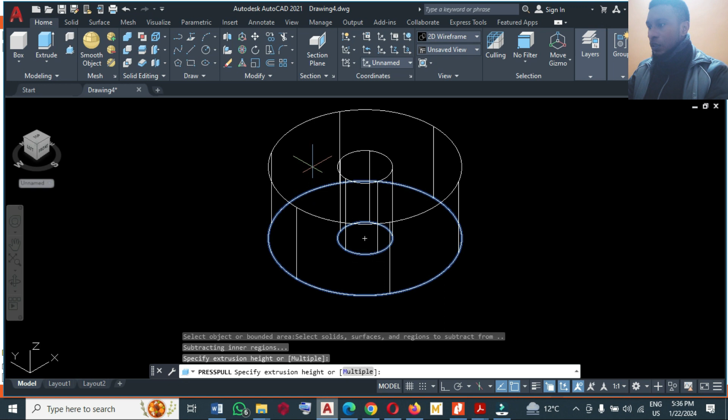So at this point I'm going to turn it to 3D. You click on the icon here, look for press pull. Let's make use of that and then let's change the visual style. I will have this. Okay, so now our drawing will now begin.

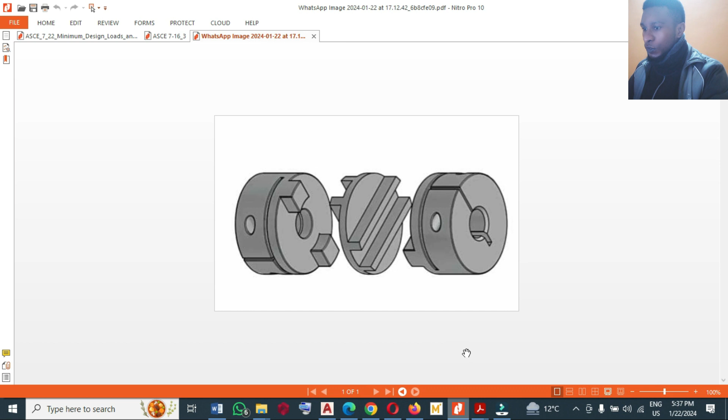Okay, so let's look at the drawing and see what we are going to add. First of all, we are going to add this at the top. For us to add that, we are going to draw a rectangle.

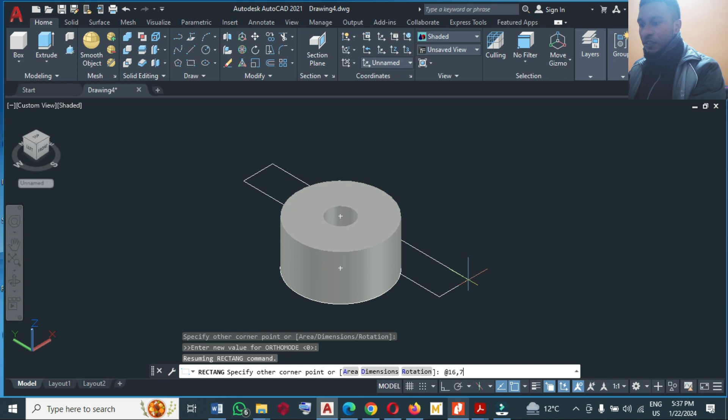Let's make a rectangle of, say, 16. So you can type at 16 comma, you can type 70. The other 70 does not really matter. Okay, so I'm going to move this to this center here.

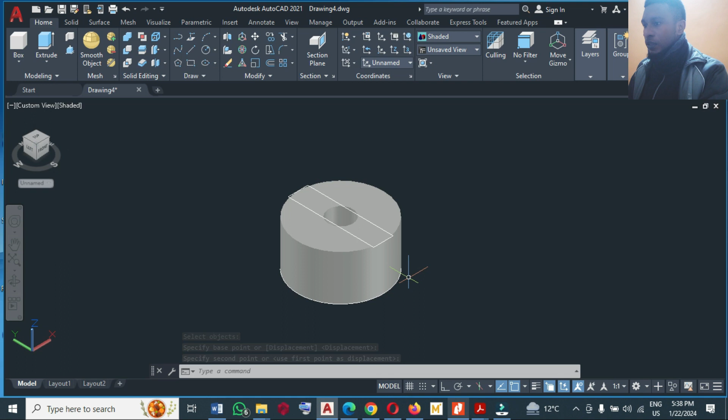Okay, so at this point I'm going to extrude, press pull this. So I'll take this place up 10 units. I'll take this one up also by 10 units. I can now delete this rectangle, it's not required anymore.

Okay, so let's check the top view of this. Okay, it's perfect.

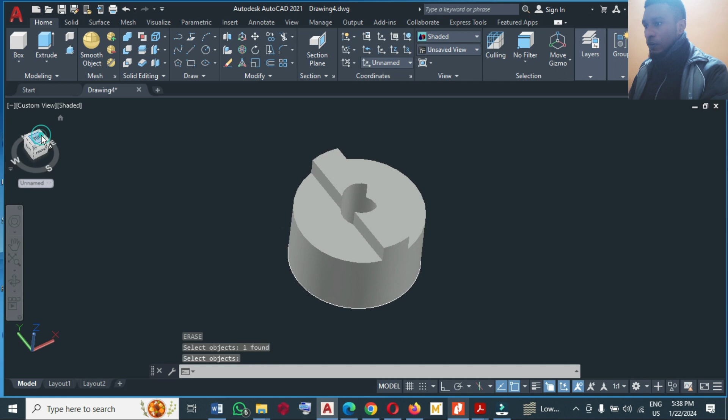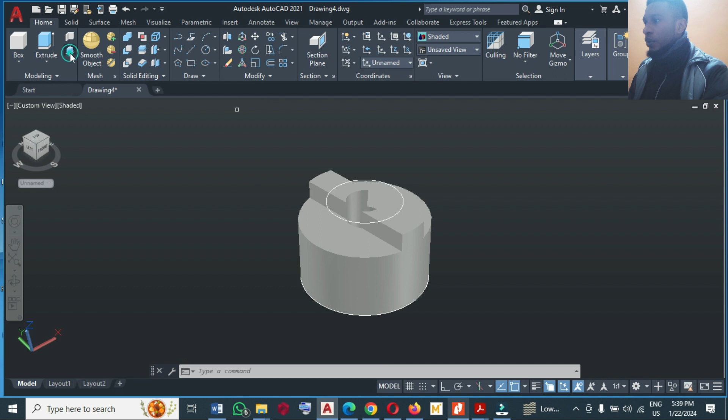All right, next thing I'm going to do is I want to draw another circle at this center point. Then this circle will be 20, that is a radius of 20. Okay, so I'm going to press pull this or extrude, either one, and press pull it. I'm going to use -10 because I'm going downward.

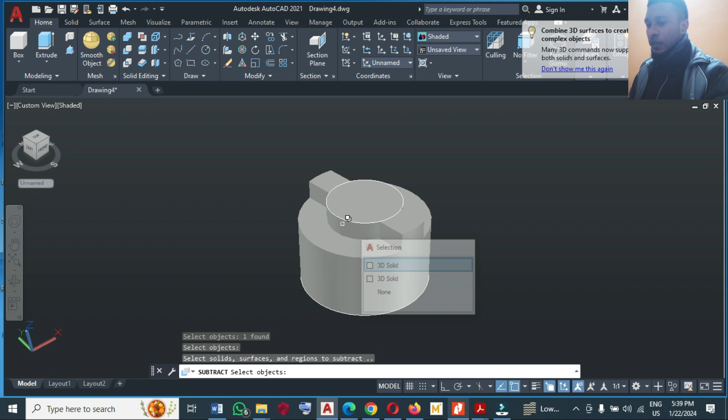Okay, so at this point I'm going to subtract. So you click subtract, you click the main drawing and you click here, enter. You have this. So I'm going to delete this circle, I don't need it again.

So at this point, let's look at the next detail we are going to add. Okay, we are going to add this particular depression, this groove inside here. So let's see how that is done.

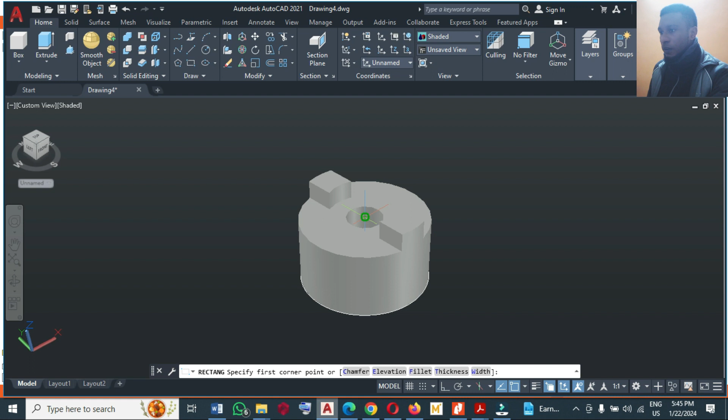So at this, I'm going to pick a rectangular tool here. I'm going to start drawing it from here. So I will type, let me type like 70 by 75. Let me say 75 here. I will have something like this.

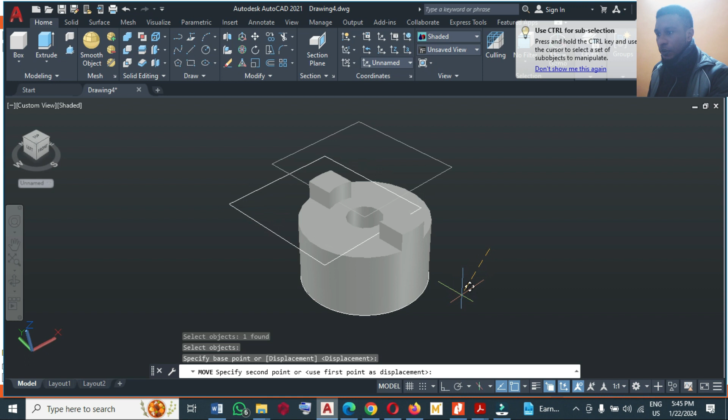So I'm going to move it from there down here. So let me turn on my ortho mode so that it's going to be straight.

Okay, so what I'm going to do, press pull now. So from press pull I will enter a height of 1.6. I will have this.

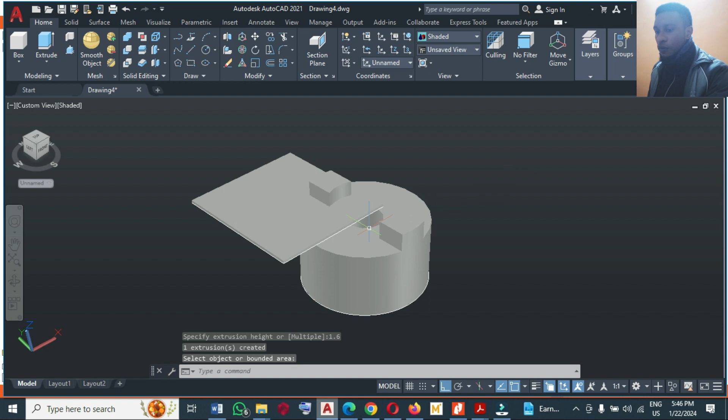So I want this to go to be at 10 level lower than the main 3D object. So I will move it downward, then by 10. After moving that, let me delete this one off here.

So I'm going to move it to the other side so that it will cross the whole drawing like this. Yes, and then let me check. Yes, just make sure it passes this edge like this. So I can even move it this side further. Okay, let's go back there.

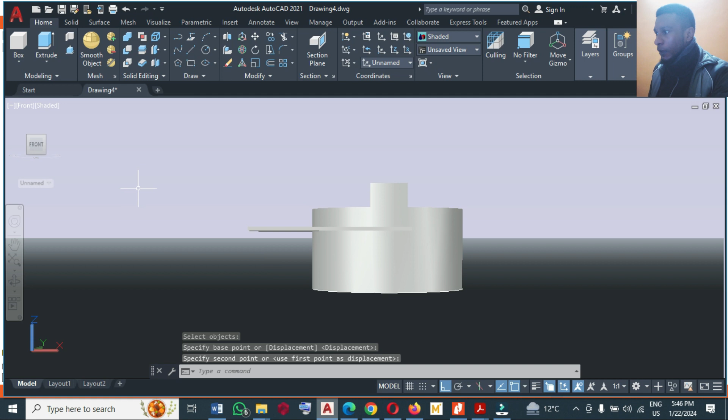So I can now subtract the drawing. So I will click subtract here. Click on this 3D solid, enter, and I will click on this, enter. Then I will have that groove. You can see that groove now.

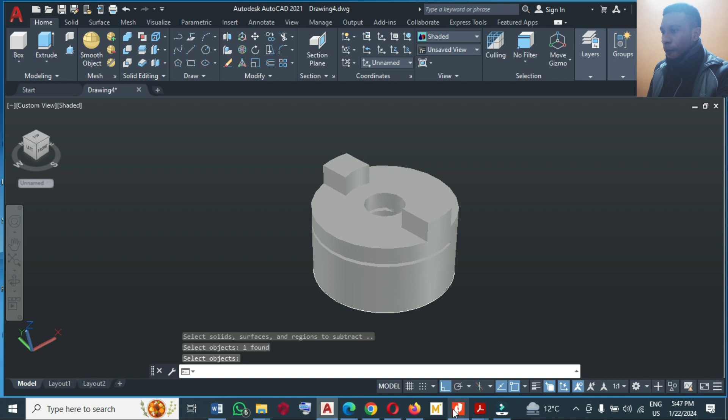So the next detail we are going to insert now is this part. This part. So without wasting time, let me check this face. Okay, so I'm going to draw. Let me change this UCS here to view.

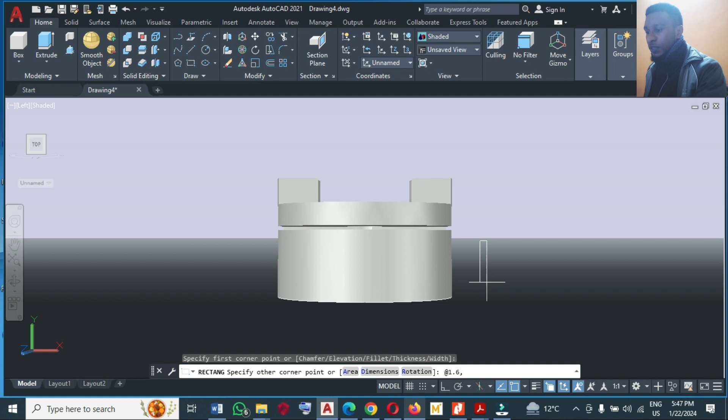Then I'm going to draw a rectangle, something like this. So I will type at 1.6 comma, let's say 70. 70 is not really necessary. Okay, so let's check where we have that.

We have it here. So I'm going to press pull this. I'm going to press pull it to as long as I want, enter, and then I will move it.

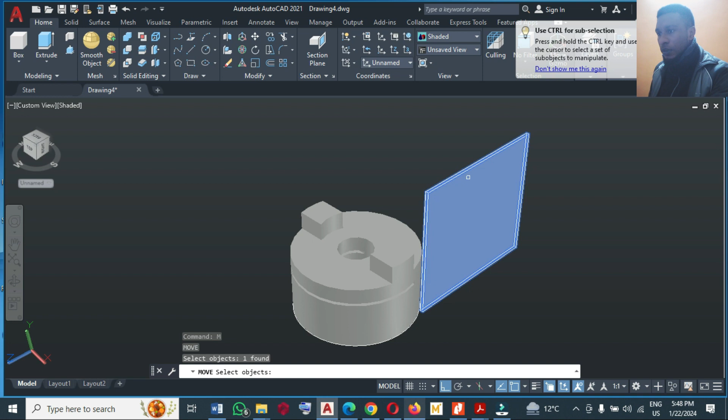So I'm going to move it here to this point, and then let me delete the 2D drawing there. I'm going to move this thing downward by 10. Let's change it to world UCS.

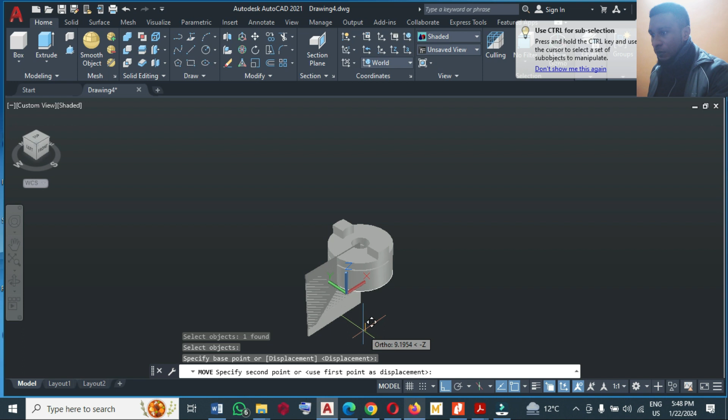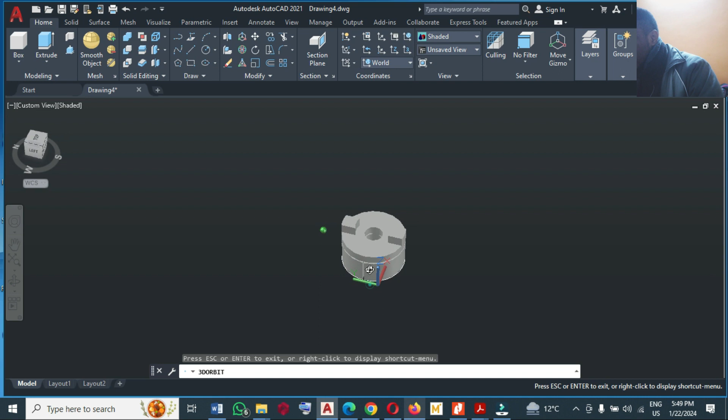Move, click this, drag it down by just 10. Okay, so now we can subtract. Click subtract here, click the main drawing, enter, click here, enter. We have this. Let's check if we have done that correctly or if it has entered the other side. Okay, it's on the right part.

Let's check the next detail we are going to put there. The next detail is this round hole. Let's do that immediately. From the home menu, let's choose front view here. From there we are going to make a circle.

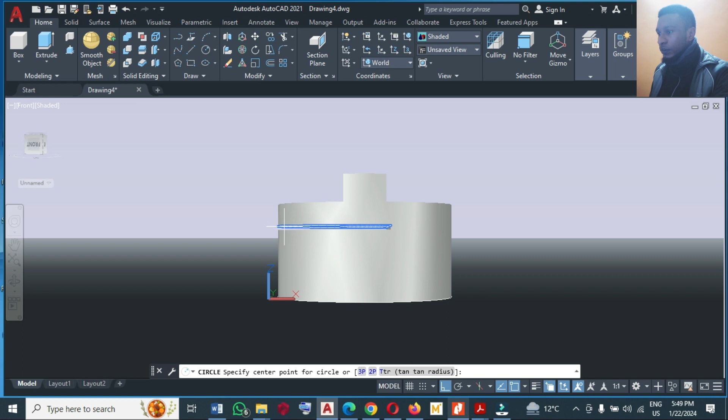Just make a small circle. Let's choose view from here. We can now make a circle there. Say 10 or 6, let's say 6. Let's see where we have that circle.

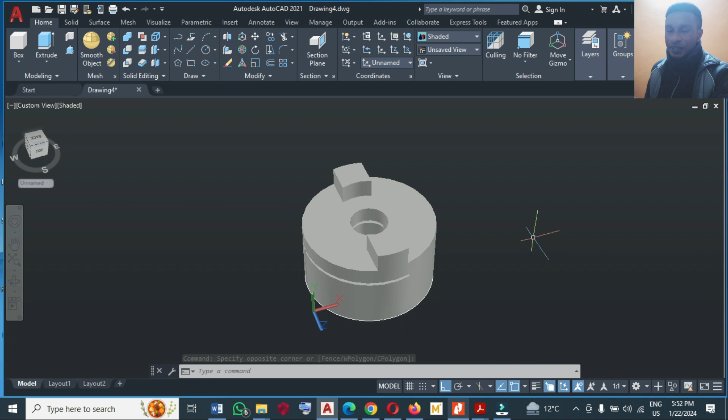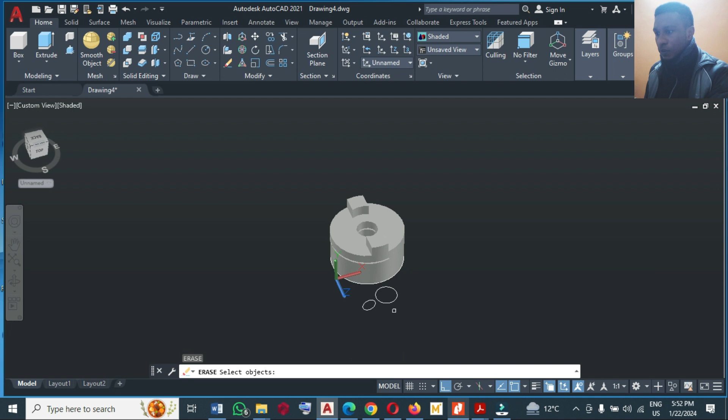Let's see how we can select the circle and bring it out. Let's type move, M, and see if you can get it from here. Okay, it's there, so let's move it out like this. Follow that. Alright, this one is not required anymore, so I'm going to delete this. Okay, so we are here.

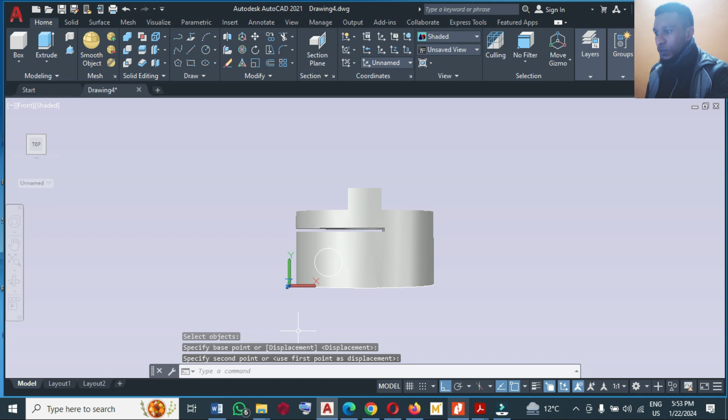Oh, the circle was okay. I'm going to move this circle somewhere here, yeah, somewhere here is good. Alright, so I'm going to extrude this circle now.

So click extrude, click here, and can extrude it like this. Okay, let's look at the drawing once more. Alright, we are on the right track.

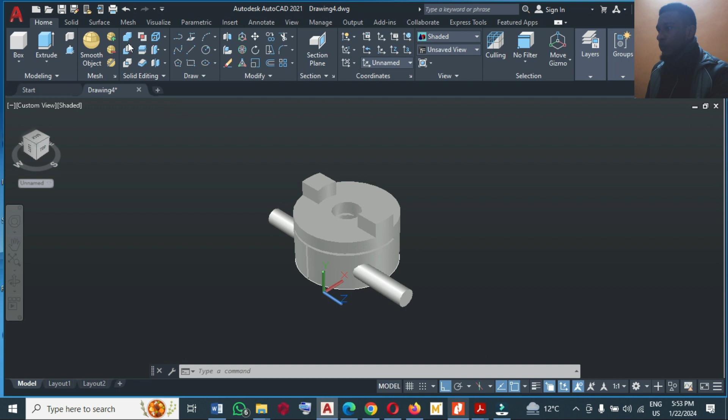I think we can move it a little, let it be like that. So let's subtract it now. I'm going to click subtract here, click the main drawing, enter, click here, and then I have this. Okay, we are almost done.

Let me move this here. Let's look at the drawing again. What next? Okay, what I can see is from this side I'm seeing this key here, this key.

So let's put that. Now I'm going to turn it to the front here. So at this front, I'm going to draw, click view here. I'm going to draw a small shape at 20, 1.6. I'll have something like this.

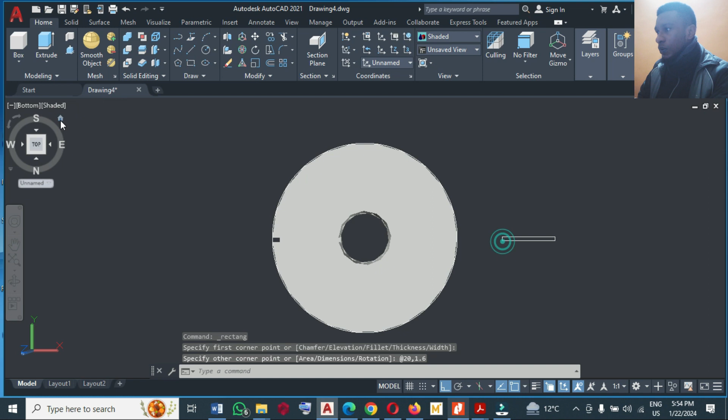Let me see where I have that. Okay, so I'm going to do press pull. I'm going to press pull this up to some distance. Let me just stop somewhere here. Let me not press pull somewhere as that height. So let's go back to that.

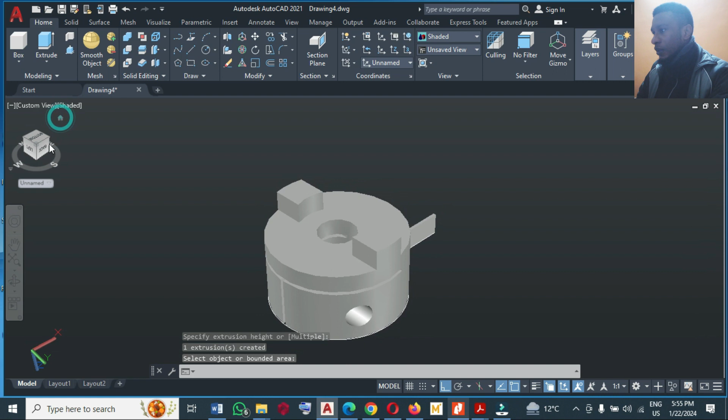We can rotate this. Okay, so I'm going to move this. I'm going to follow that direction. I move it like this.

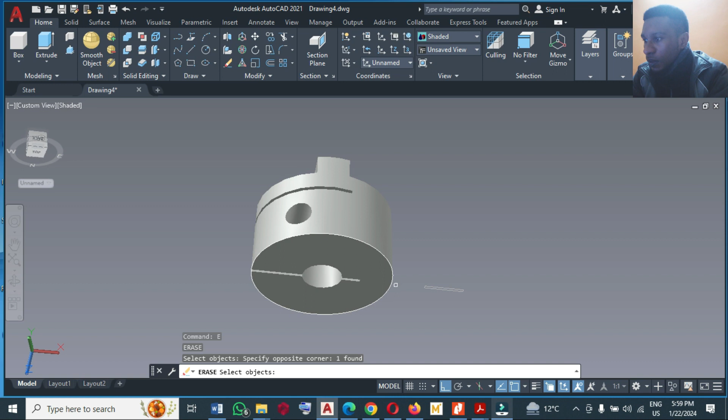So I'm going to now subtract. Click here, enter, and then click here. Yeah, we have that groove, that key there, that keyway. Okay, so we are almost done. Let's look at the drawing again to see another detail.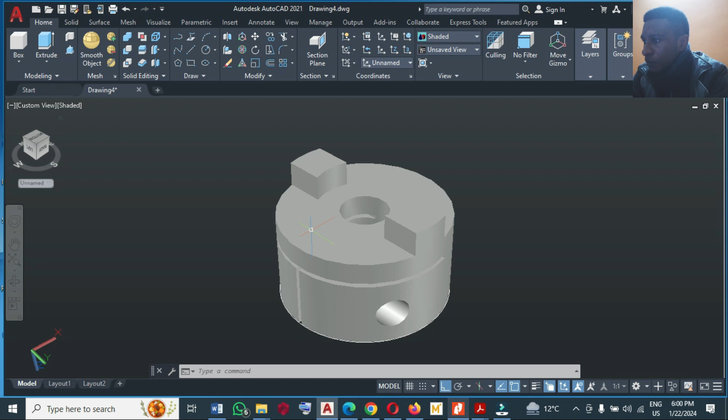Okay, what I can see here is this fillet. Let's see how we can apply that fillet. That fillet is at the bottom. So let's go to this top view. Instead of fillets, let's use chamfer, chamfer will be better.

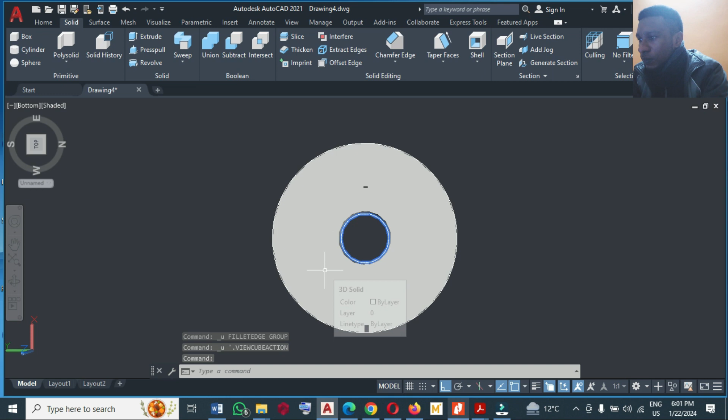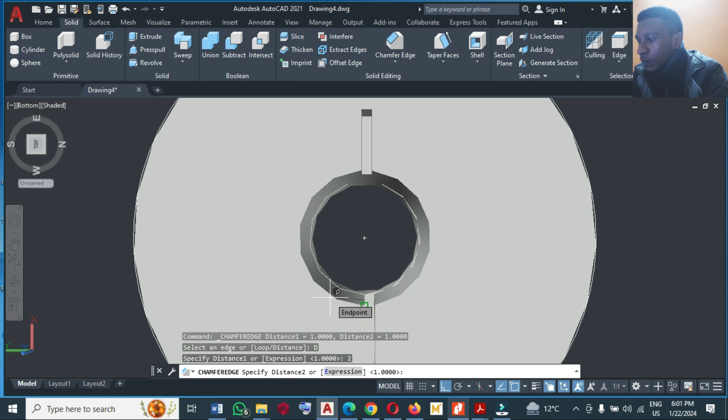Let's delete this. Okay, chamfer will be better. So let's click chamfer here. Select this and put, let's put two, enter, and then two, enter, and then let's click on this edge. Let's click on this edge. Enter twice. Then we have that.

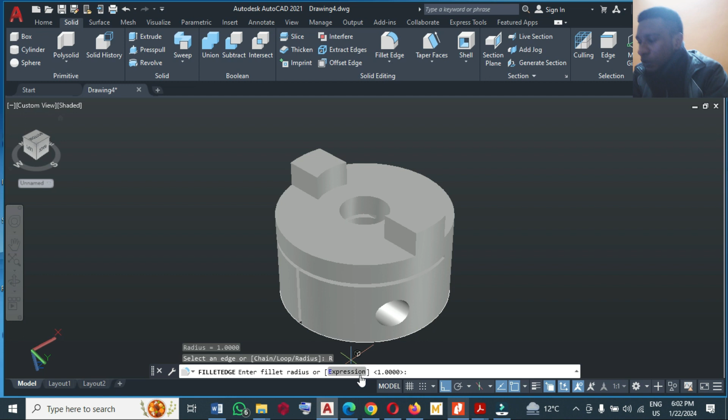Okay, so let's return home. Then now we can apply fillets. So let's apply fillets, say radius. Let's use radius 1.

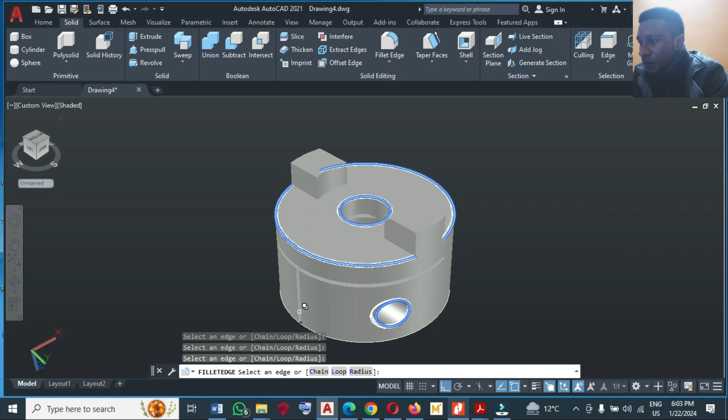I'm going to select this edge. Yes, I'm going to select this side also. I'm going to select this. What else? Let me select this also. Alright, for now let me stop there and enter. I'll have this. So I'm going to do the same to the other side.

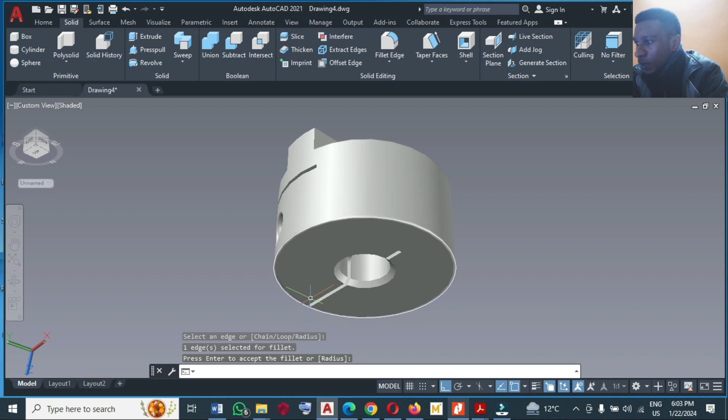So let me go to the bottom side so that I'll be able to select. Okay, let me revolve it somewhere like this. So I'm going to click fillet again. Select this. Enter. Okay, let me check the other hole. Select this. Enter twice. Okay, and we have this.

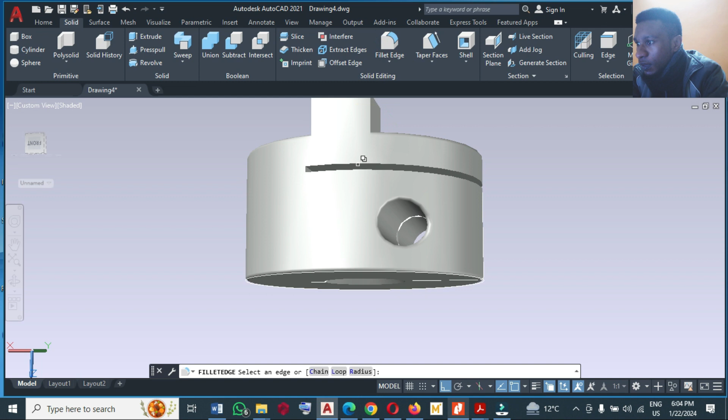Okay, let's check the drawing very well. I think even this place also needs fillets, here and here. Enter twice. Yes. Let's go home. Okay, so as you can see, fillet is not applied throughout all the edges. So let's do that quickly.

So let's click this fillet again. I'm going to click this edge, click this edge, click this edge, this edge, this edge, and this edge. Let me check once more. Even this edge is also needed. Let's check all the edges here, I have to apply fillet.

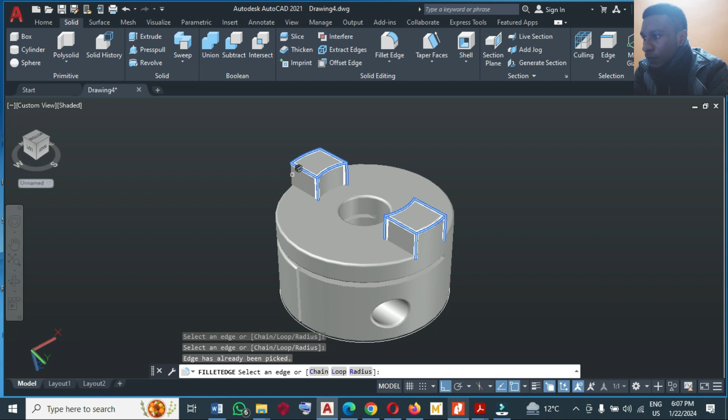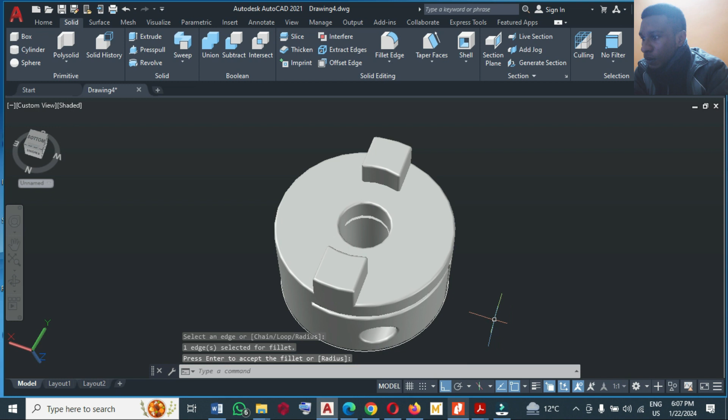Enter twice. You have this. So let's rotate to the other side to add it here also. I will click fillets and add it here.

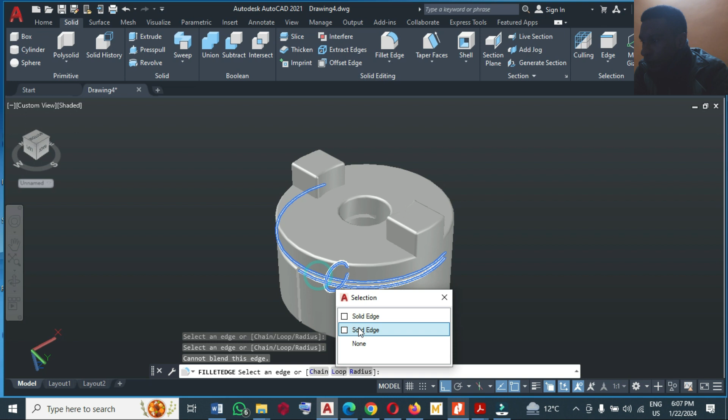All right, let's delete this circle. I think at this point we are okay. Let's add fillets here as well, here, and let's add it here also.

All right, I think we have done that. So yes, we are. Let's apply fillets here. Let's apply it here and here and that way. Yes, we have that. Okay.

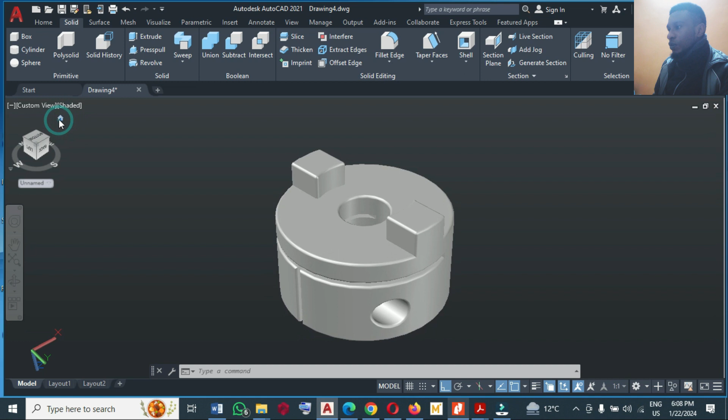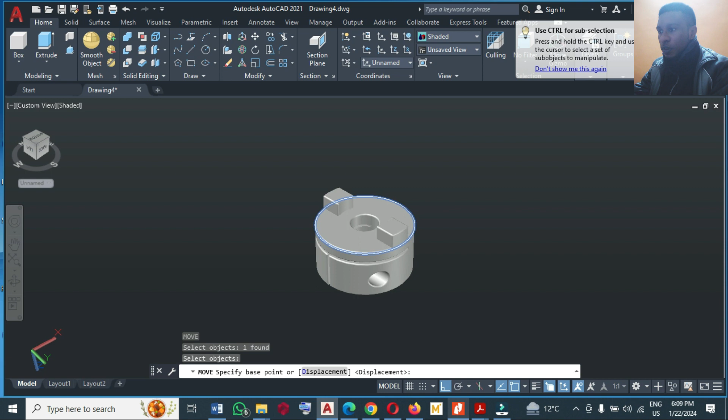35. I'm going to pull that circle upward. Select that circle, I'm going to move it up to some distance. At this point I'm comfortable, so I'm going to press pull that circle. Say 6. I have this, okay?

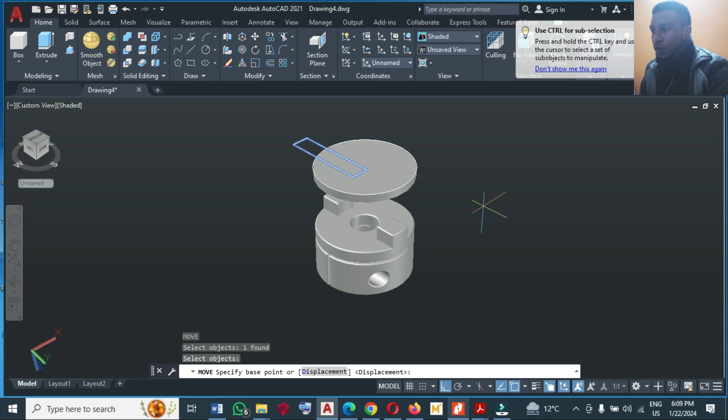So I'm going to draw a rectangle, say at 16. Then I can take from my, say maybe 80, yeah, or 75. Okay, let me move that. I'm going to move it to the center. Select the center and put it here at that center.

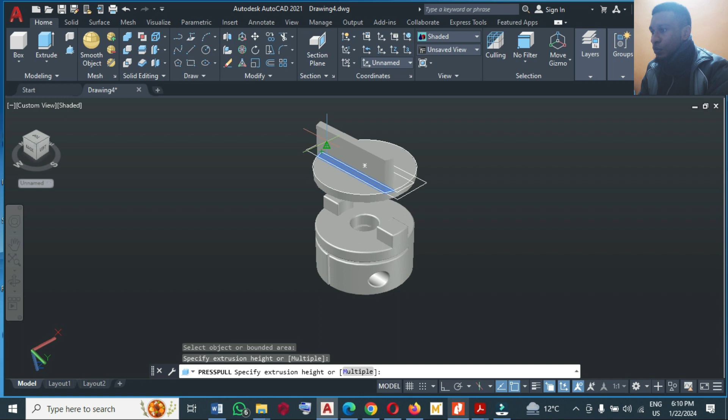At that point I'm going to offset, say 6 up. I'm going to offset outward 6. At that point I'm going to press pull. Let's check press pull here. I'll press pull 10 units, press pull this one 10 units. Okay, all right, so I can do the same thing

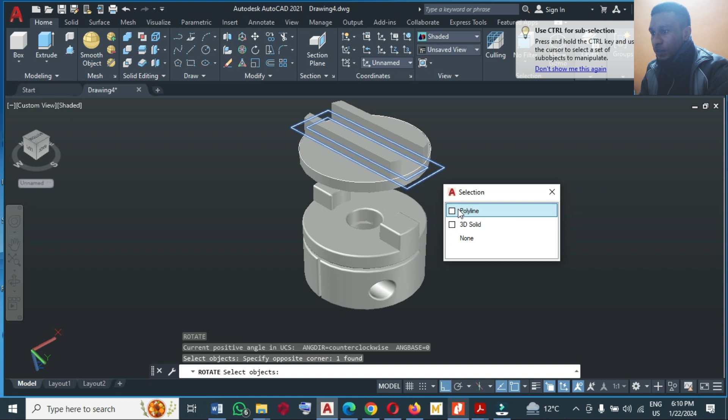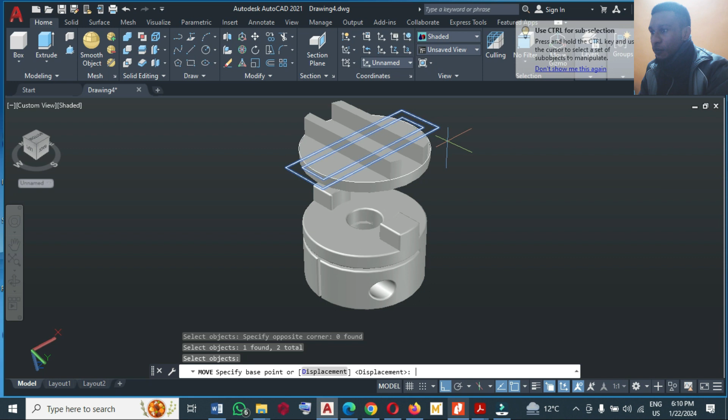Under—but before I do that, I have to rotate the existing rectangle, these two rectangles here. So enter, select the center point. Yes, I want to rotate it like this. After rotating, I'm going to pull it down. So I will select it and move it downward, a distance of 6.

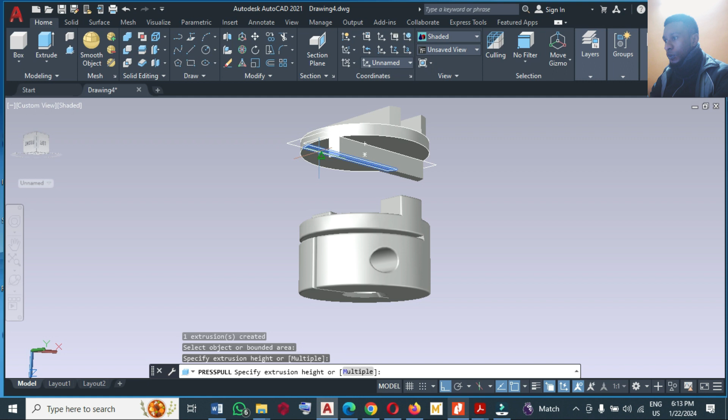Now we are going to rotate this so that we can press pull from the bottom side. I'm going to click press pull here and also do the same thing, 10, and this also 10, and I will have this. At this point, let's go back home.

At this point I can delete these rectangles, can even delete this circle also. Yes, enter. Okay, so without wasting time, let me use this opportunity and fillet it throughout. Let me do fillet throughout all the edges here.

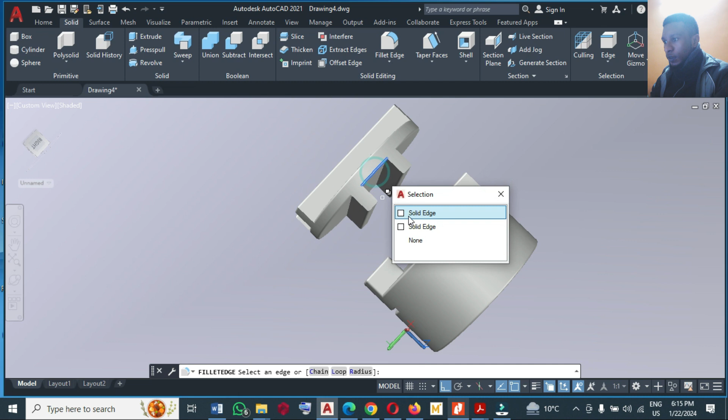Now, all right, so we are done. Let's look at the drawing once more to see what is going on. Okay, so what we are going to do now is mirror image of this. So let's mirror.

So you can go home here, you see 3D mirror here, you click on 3D mirror, you click here, enter. You can select this XY plane, okay? Just mirror it and enter.

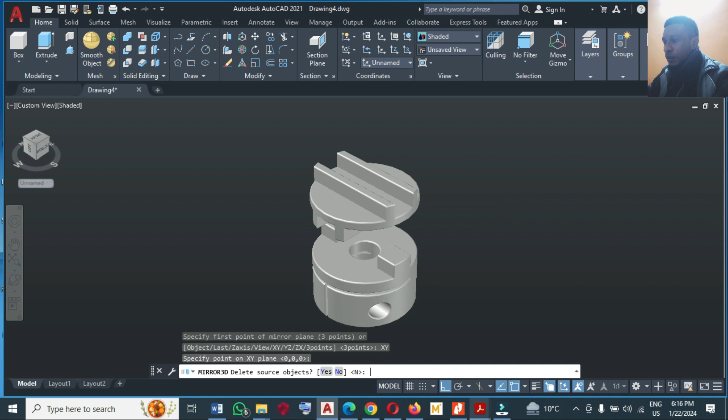Now you can move it up. So let's move this upward. Okay, I move it like this and I'll have this.

At this point, I'm going to rotate this so that it will fit this drawing. I will rotate the downward one, and then you can select the center point here and enter. I have rotated it, so as you can see, everything fits inside.

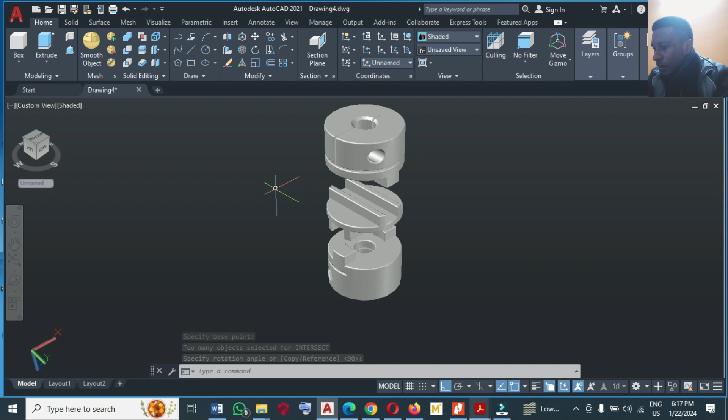You can move it to see how it fits in. You can move it like this. See, it fits there. This one also fits inside here. You can add as many details as you want.

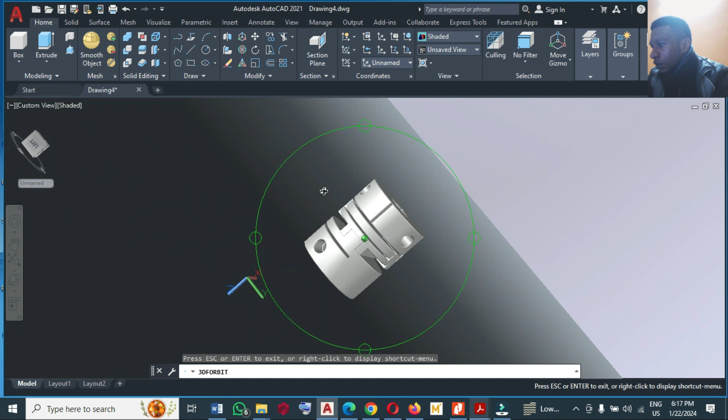See now, you can add as many details as you want, but at this point, this is where we are going to stop. Let's separate them.

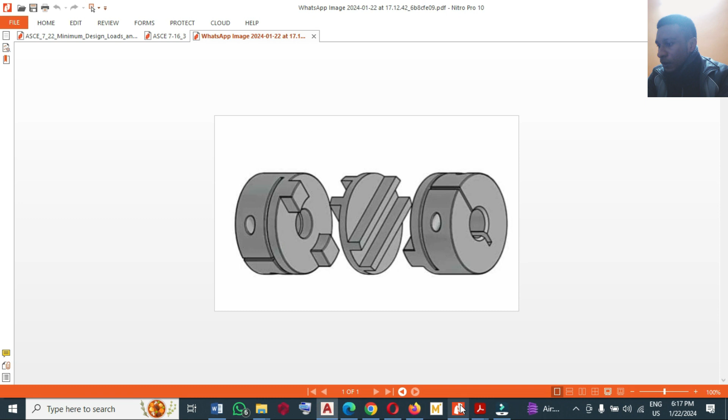Okay, so let's look at the main drawing. Okay, so we have this. Okay, we can rotate this. Okay, I think this is the position we have here. Yeah, exact position.